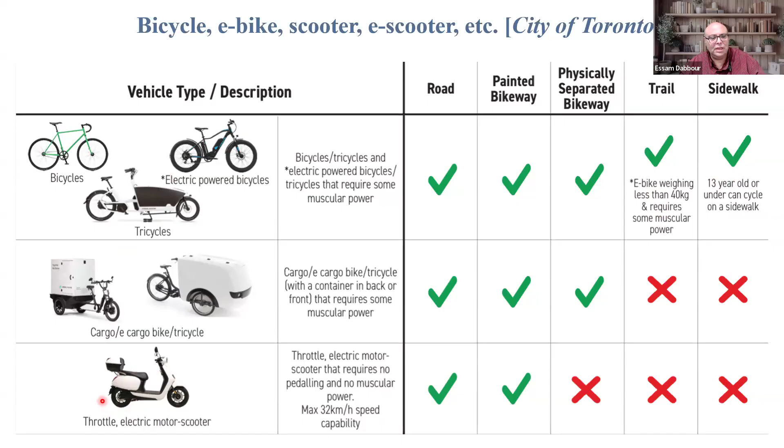Of course we have electric motor scooters, e-scooters, which are more common. I'm a little surprised here because I was not aware that the City of Toronto prohibits e-scooters on all types of facilities, even though I see those e-scooters in many other municipalities.

On the other hand, the kick scooter, the manual one, is only allowed on sidewalks and multi-use trails, but not allowed on roads or cycling facilities. Don't forget, this is in the City of Toronto - each municipality has its own regulation.

By the way, this is one thing I understand will be discussed during the upcoming CARSP conference about micromobility, and how municipalities can reach a standard way of allowing different types of micromobility so that users will not get confused.

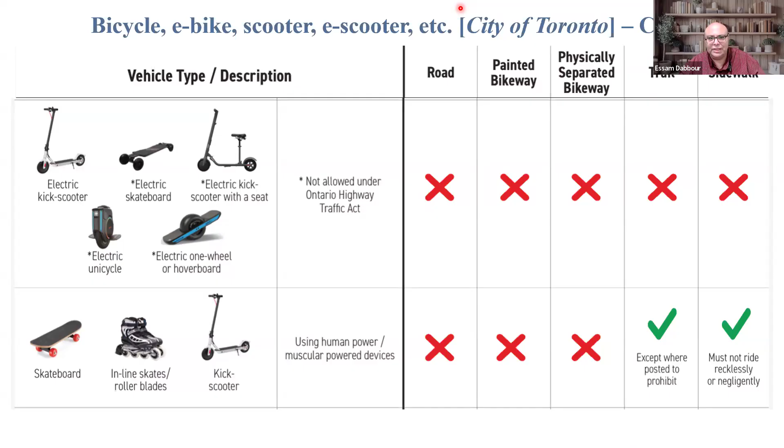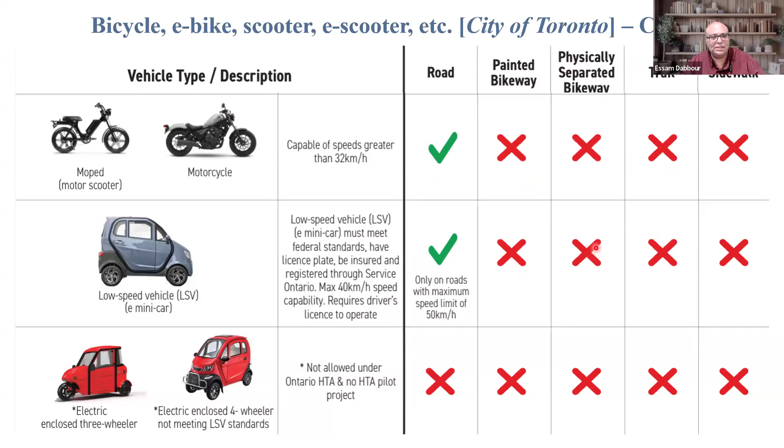Of course, a motorcycle is only allowed on roads, not allowed on sidewalks or cycling facilities. We have some other types of facilities for micromobility as well.

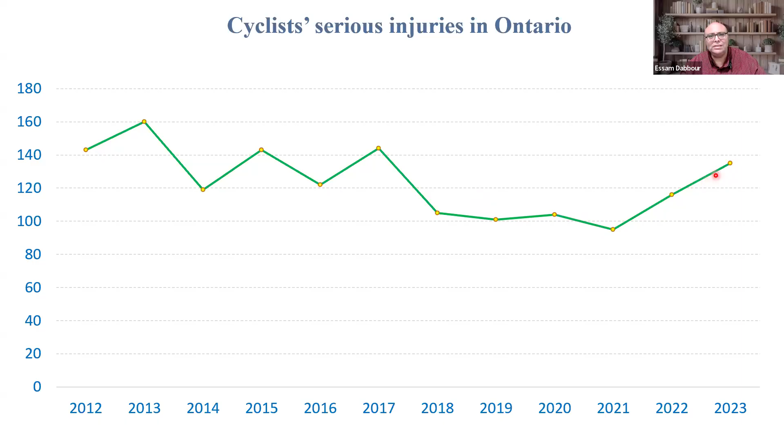In terms of serious injuries, it looks more steady than in Canada overall. It seems Ontario is doing a good job in terms of cyclist safety compared to other provinces, because serious injuries seem to be going maybe a little down or at least staying steady, not going up like the overall number in Canada.

In terms of injuries, the numbers seem to be going down, which is also very good news, especially knowing that cycling facilities in Toronto are increasing and many more people are now cycling compared to 2016, for example.

In 2016, fewer people were cycling and there were 37 serious injuries. In 2025, more people were cycling and there were only 27 serious injuries. Of course, again, we hope the number would be zero.

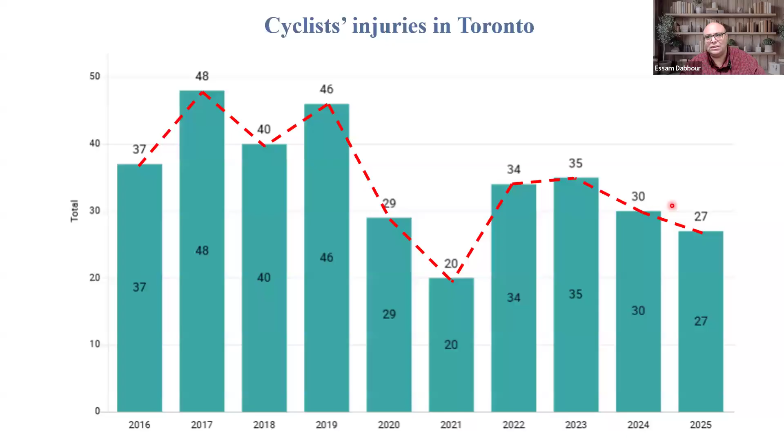To understand bicycle collisions, first we need to understand what we mean by momentum. As safety professionals, we understand that when two masses collide together, the impact depends on the momentum, which is the mass multiplied by the velocity. So the first mass has a mass of m1, moving at velocity v1, and the second mass m2 moving at velocity v2. The higher the mass or the higher the velocity, the more impact it will cause, and more impact means more injuries.

By understanding this principle, first we have a bicycle colliding with another vehicle - a passenger car, a heavy truck, or a bus. In this case, the bicycle has a lower mass and is usually moving at lower velocity, so most likely the cyclist will be hurt much more than the occupant of the motor vehicle. This is why we call cyclists vulnerable road users.

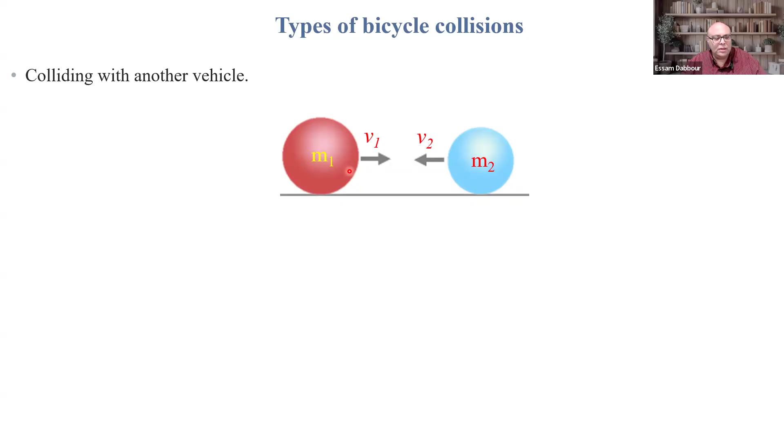On the other hand, if a bicycle collides with a pedestrian, it is a little bit different story. I'm showing these two images here. This is in case a bicycle is using the pedestrian crosswalk, which is not allowed by the law, and in this case the cyclist may collide with a pedestrian on the crosswalk. Or here in the other image, a cyclist is using the sidewalk and may collide with a pedestrian on the sidewalk, which is also not allowed.

In this case, by using the same principle of momentum, the mass of the bicycle and its user is slightly higher than the mass of the pedestrian. But the real problem is in the velocity. A bicycle is moving at a high speed, maybe 20, 25, sometimes up to 32 kilometers per hour, as compared to a pedestrian who is only moving at 4 kilometers per hour speed. So there is a large difference in speed, which in this case may result in injuries to the pedestrian.

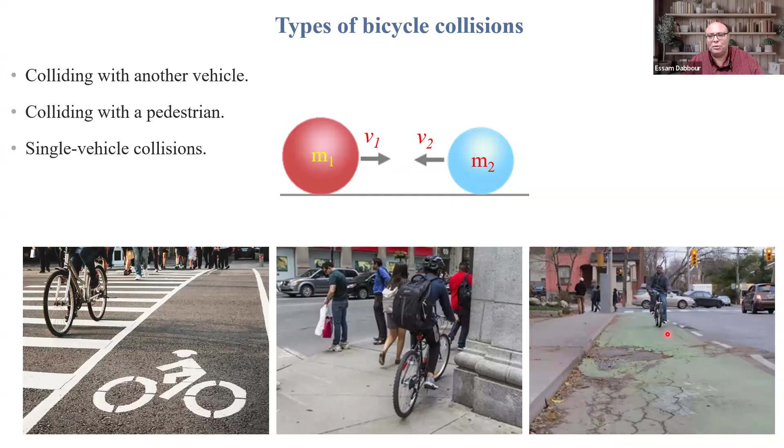I have already investigated many collisions like this one - a cyclist is using a cycling facility that is not well maintained, and the cyclist gets ejected from the bicycle and gets hurt. So this is the third type of bicycle collision.

We also understand that safety is always a shared responsibility, and this is the same principle in terms of cyclist safety. So the safety of cyclists depends on many stakeholders. First of all, the law - there should be laws that protect cyclists. For example, vehicles are not allowed to drive over cycling facilities, or vehicles must give right of way to cyclists, and other laws. So in terms of lawmaking and law enforcement, this is one factor that affects cyclist safety.

The second factor is the road authority, which must plan, design, operate, and maintain safe cycling facilities - we'll talk about this in more detail in the next slides. The third factor is other road users, who must respect the rights of cyclists and give them some space. And the fourth and most important factor is the cyclists themselves.

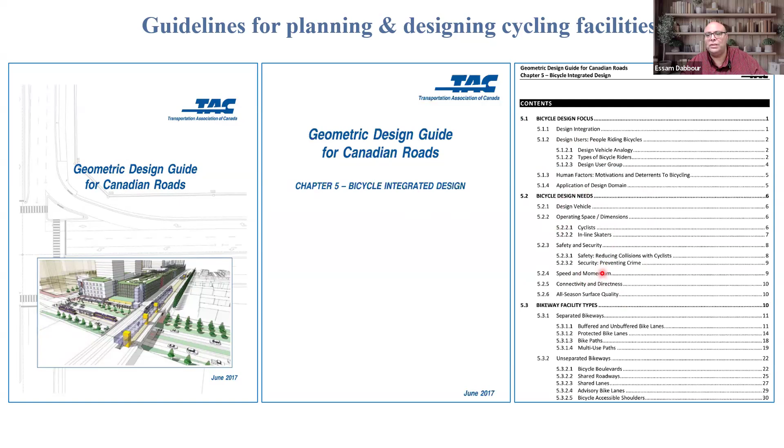We already explained momentum before. And what are the different types of cycling facilities? We'll talk about different types of cycling facilities in a few minutes.

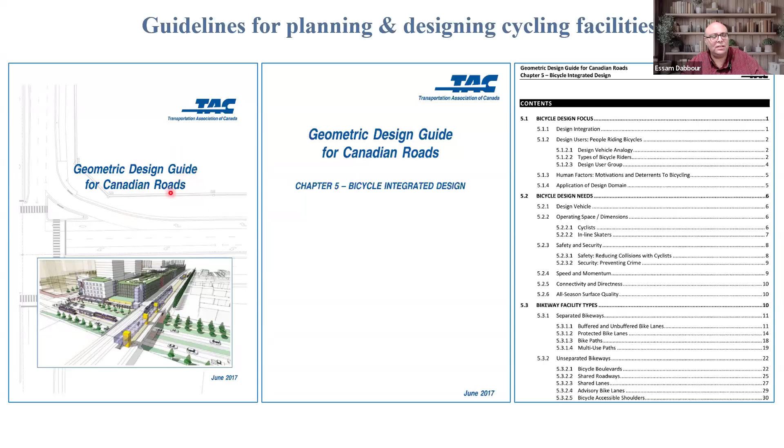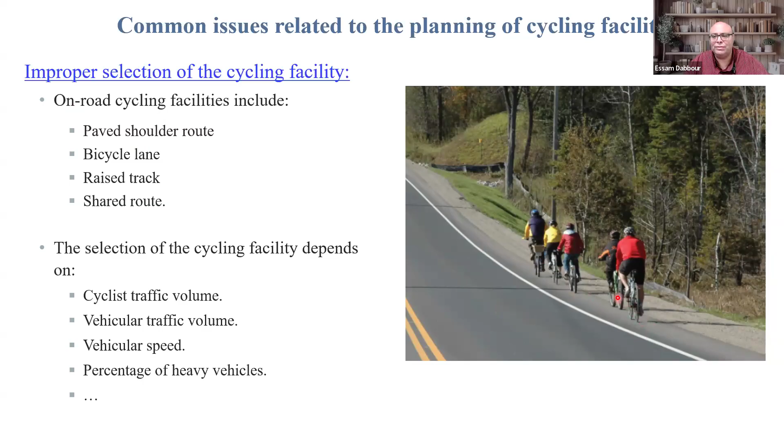This includes the paved shoulder route, like what you see here. This is more typical in rural areas where the shoulder is paved and provided for cyclists to use.

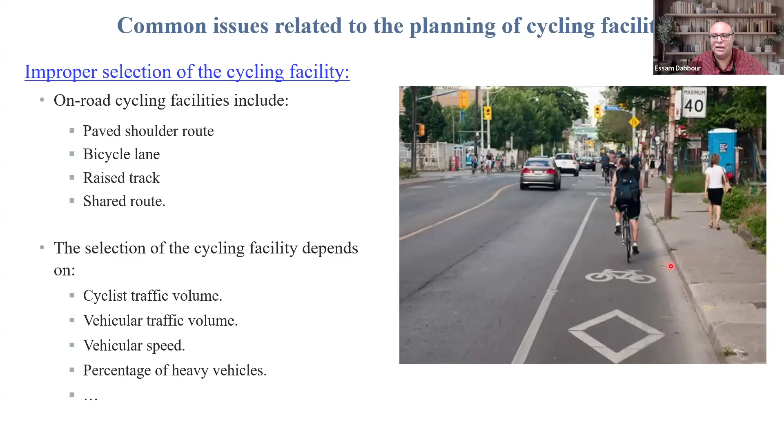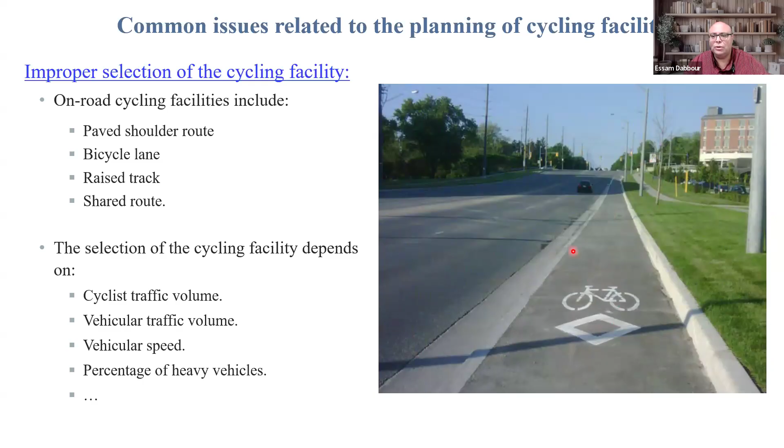Or a bicycle lane, like this one you can see here. This bicycle lane can have a buffer zone, or sometimes it does not, depending on space availability. There's also the raised track, more common in York Region, where cyclists use a raised track separated from the traffic lane and also from the sidewalk. Or a shared route, the lowest class of cycling facility, typically a traffic lane where cyclists are allowed to share with other motor vehicles.

The selection of the cycling facility depends on, of course, the number one factor I didn't even mention: the availability of space. If we have more space, we can provide a dedicated cycling facility. If we don't have more space, then unfortunately we may end up only providing a shared route like this one.

But there are many other factors, including cyclist traffic volume - if we have more cyclists, they need more dedicated facilities. Vehicular traffic volume - more vehicles means more risk and hazard to cyclists, so a dedicated cycling facility could be warranted. Vehicular speed - higher speed means more hazard to cyclists, meaning a dedicated facility could be warranted. Percentage of heavy vehicles - because of their very large mass, if a cyclist gets struck by a heavy vehicle, a bus or truck, it is almost certain to be a fatal collision. So a dedicated cycling facility could be more warranted if we have more heavy vehicles in traffic.

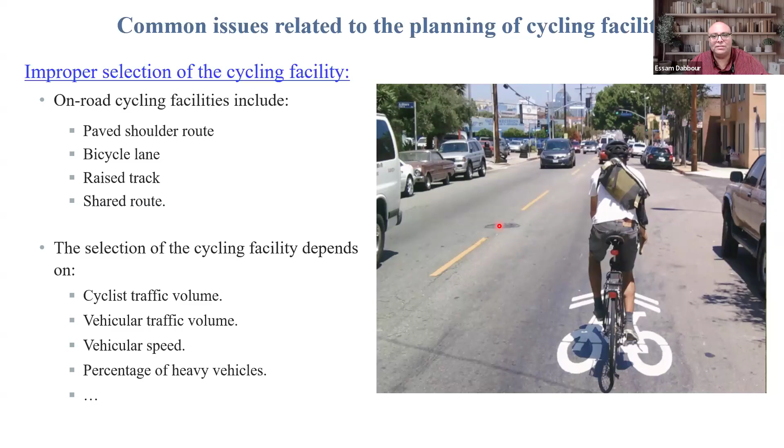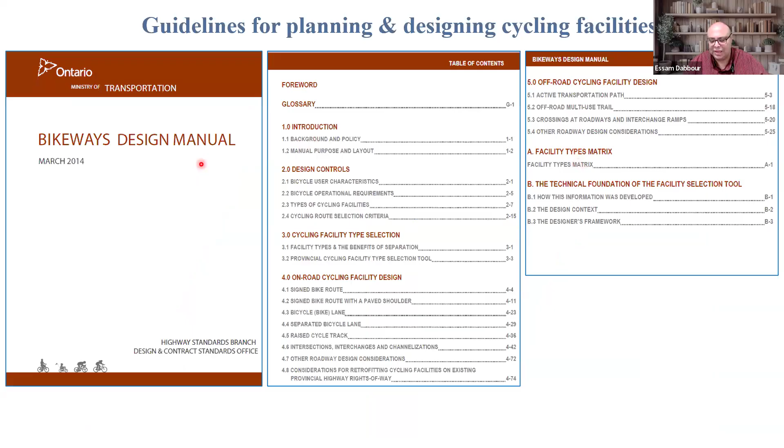So it is a somewhat complicated process to select which type of cycling facility to use. I understand this manual has a decision tree you can follow to decide on the type of cycling facility. You can see it here in this manual, and it's also in the Ontario Traffic Manual. There's another decision tree provided in the TAC guidelines as well.

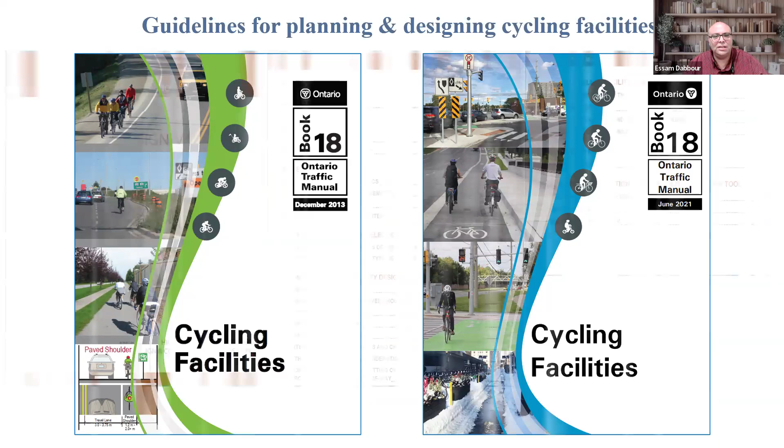Another common issue is if the road authority decides to install a dedicated cycling facility while there's a large right turn volume. In a case like this, theoretically speaking, the driver should always check for the blind spot when making a right turn, which is true. But unfortunately, drivers sometimes forget, or sometimes they don't care, or sometimes they check but are physically unable to see an oncoming bicycle. In this case, there could be a collision between a right-turning vehicle and a bicycle on the dedicated cycling facility. I have already seen at least 18 or 20 collisions like this.

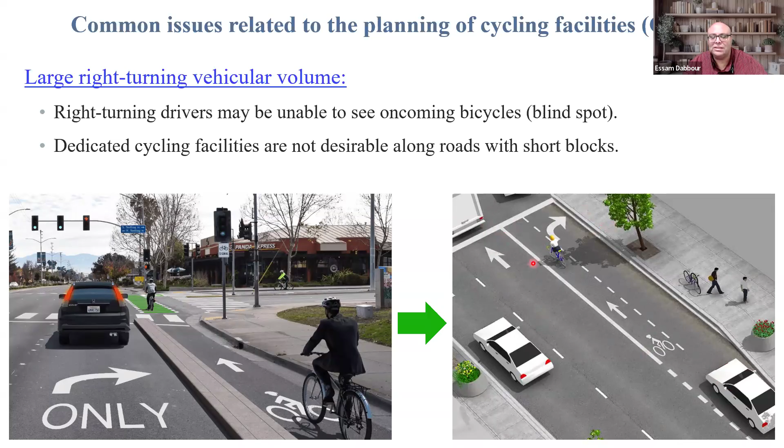Because of this, the rule of thumb is that a dedicated cycling facility is not recommended if the road has short blocks. If we have many cross intersections along the road and many drivers are making right turns at those intersections, a dedicated cycling facility is not recommended, or if you provide it, then you need a signal for the cycling facility, like this signal here. There could be a solution where the right turn starts before the intersection so drivers can merge before reaching it. This may reduce the risk a little, but it will not eliminate it. The rule of thumb is usually to avoid cycling facilities on roads with short blocks and several intersecting streets with high right turn volume.

Another problem here is on-street parking. Unfortunately, many cyclists get hurt because of what we call dooring. This is when a driver parks the vehicle, opens the door to exit, and a bicycle is moving, and the cyclist does not expect the door to open suddenly and ends up colliding with the open door and getting hurt. This is called dooring.

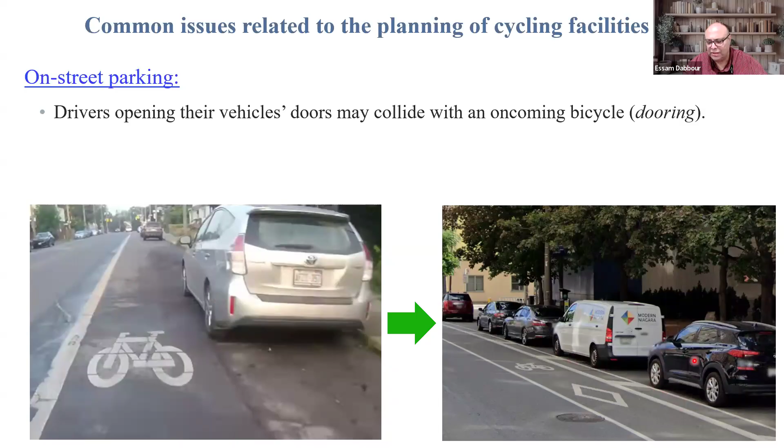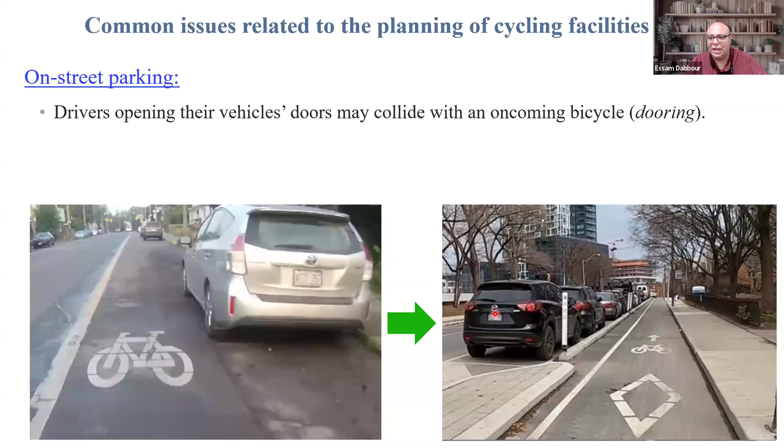Because of this, it is not recommended to use this configuration for on-street parking. Instead, many municipalities now use a buffer zone between the on-street parking and the cycling facility, a buffer of at least 1 meter to allow the door to open without colliding or obstructing the path of cyclists. Or a better solution is to move the cycling facility to the other side, like in this photo, so that when drivers open the driver's side door, it does not obstruct the cycling facility.

Now, let's move to other common issues related to the design of cycling facilities.

One of them is the improper discontinuation of cycling facilities. Sometimes it is necessary to terminate a cycling facility. The question here is where to terminate it. According to the latest edition of the Ontario Traffic Manual book number 18, cycling facilities should not terminate at an intersection. Instead, they must be terminated at mid-block. The reason for this is obvious, because at an intersection there are several conflict points, and drivers usually have divided attention because they have to look at all those conflict points.

So a driver approaching an intersection would be looking for vehicles coming from three other directions, vehicles making a left turn, vehicles making a right turn, and pedestrians on the crosswalk. So the driver may not notice a cyclist merging with the traffic lane. Because of this, it is now recommended to terminate cycling facilities mid-block, at least 150 or 200 meters upstream of the nearest intersection.

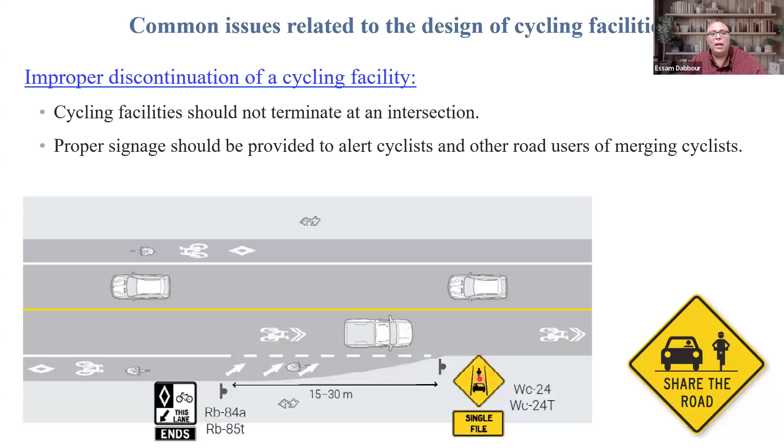However, in some situations, if it is necessary to end the bicycle facility at an intersection, then this is the configuration to use, which is not recommended. But only if necessary, you must provide a minimum of 30 meters for cyclists to merge, and of course you must alert cyclists that the cycling facility has now ended.

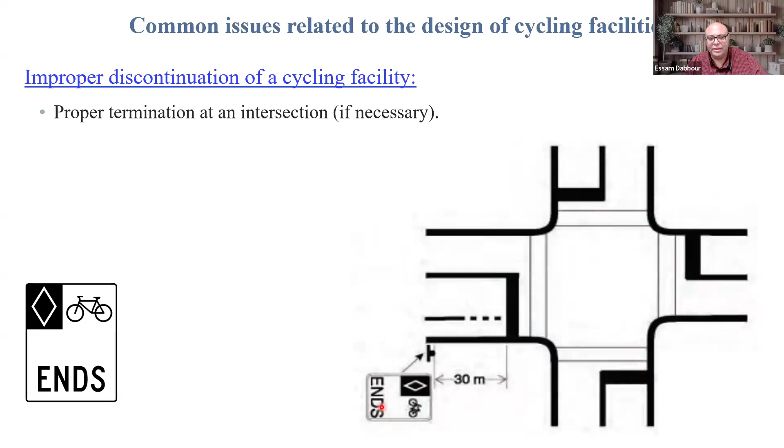Another issue common in many municipalities around Canada is the lack of bicycle crossing at intersections. This photograph I took myself while investigating a bicycle collision. Unfortunately, this is a cycling facility, and where does it go? Nowhere. Now if a cyclist wants to cross the road, they have to choose between two options, both not good: either cross mid-block, which is unsafe, or cross using the pedestrian crossing, which is also unsafe and prohibited by law. So in a situation like this, the road authority did not do a good job providing a dedicated crossing for the cycling facility.

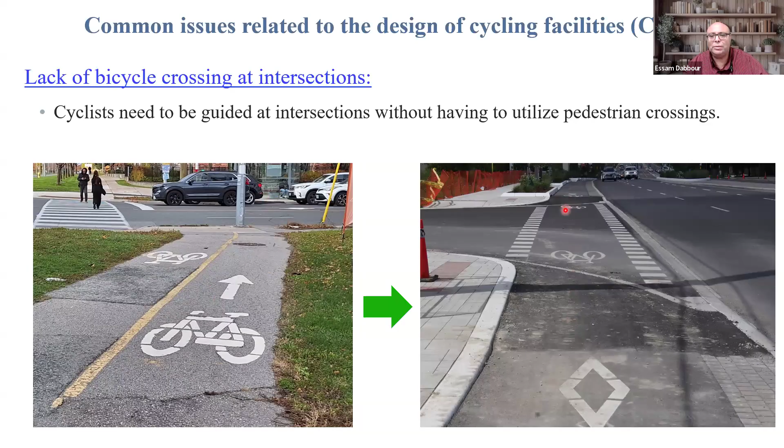And this is the proper treatment. If this is the cycling facility, there should be a continuation and a dedicated crossing for the cycling facility that is separated from the pedestrian crossing.

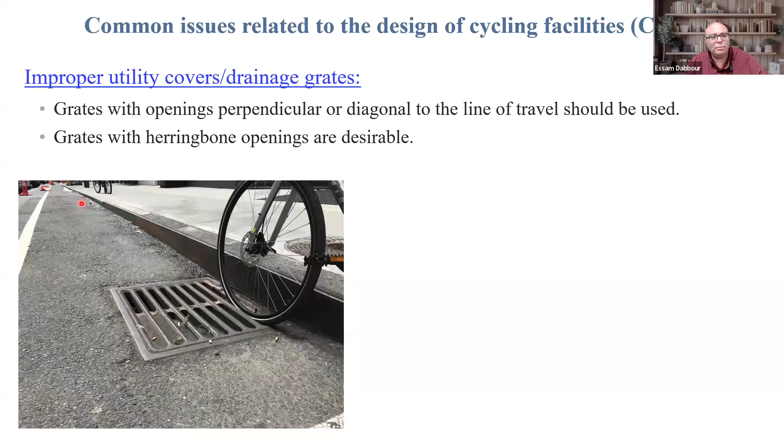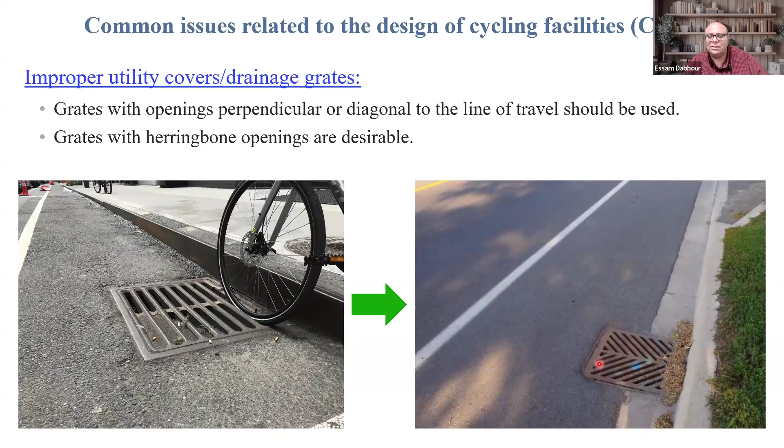Another problem is the improper use of utility covers, like catch basin covers. If you use this type of cover, the wheel of the bicycle may get caught inside it. This is why it is always recommended to use openings that are perpendicular to the travel path of bicycles, or more commonly now, what's called herringbone openings. The herringbone opening looks like a fish bone, which is more practical and safer for cyclists, like what you see in this photo.

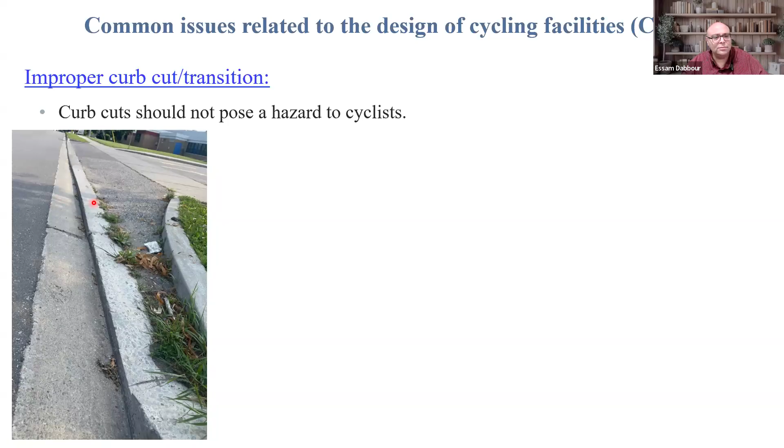Another problem is improper curb cut. I took this photograph myself when investigating a bicycle collision. As you can see, there is a high lip between the driveway and the traffic lane. If a cyclist wants to enter this driveway - and by the way, this was a school, so many kids were cycling to school - this is how the curb cut looked. A cyclist turning into the driveway may hit this lip and be ejected from the bicycle and get hurt. This is just a zoomed-in photo to show the lip.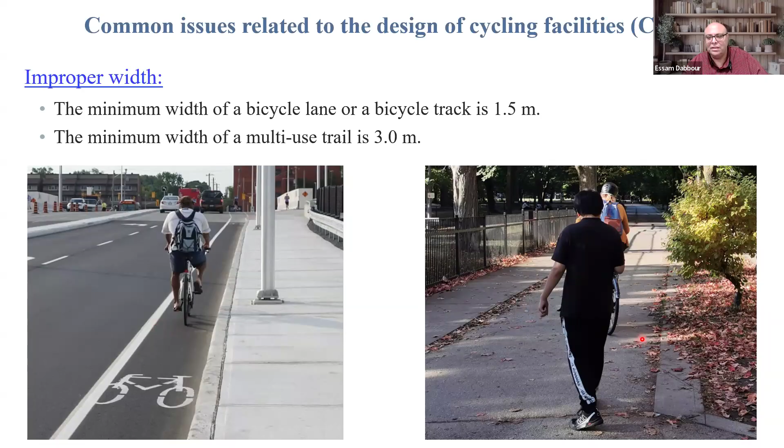And here, this is a multi-use trail inside a park where pedestrians and cyclists share the same trail together. In this case, the minimum width should be at least 3 meters to allow cyclists and pedestrians to safely share the trail. If the width is less than 3 meters, someone can get hurt.

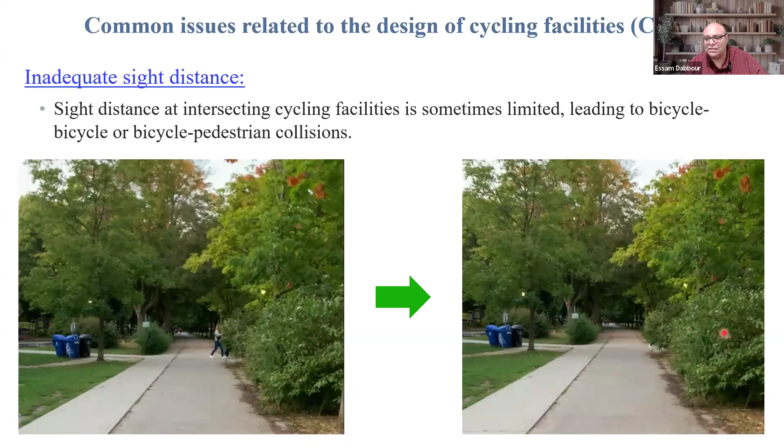Another problem is sight distance. We understand that sight distance is more commonly related to collisions involving motor vehicles, but sometimes it is also relevant to bicycle collisions. For example, this is a multi-use trail intersecting with another multi-use trail. You see where this lady and this gentleman are going - they are actually going onto another multi-use trail. If someone is riding a bicycle along this trail and someone else is riding along the other trail, they may collide with each other.

Again, you may say, if a cyclist reaches a situation like this, they must stop and look before proceeding, which is true. But unfortunately, some people don't do this. Our job in terms of safe system design is to allow for human errors. It doesn't mean we want people to drive or ride recklessly, but we must allow for normal human errors. So in this case, this tree should have been cut down or at least trimmed to allow for better sight line between the intersecting trails.

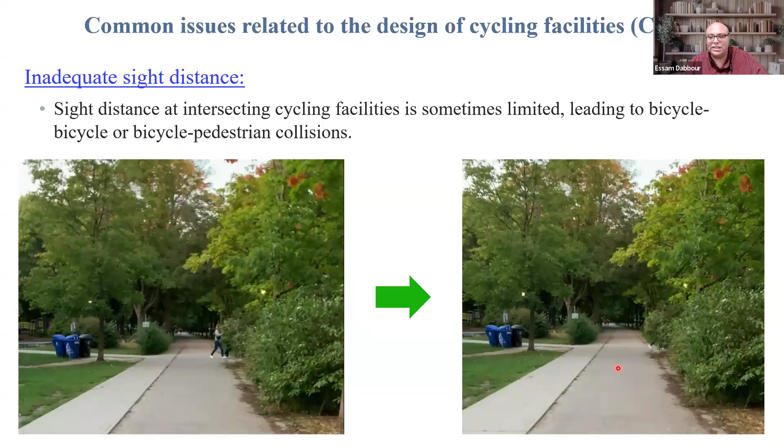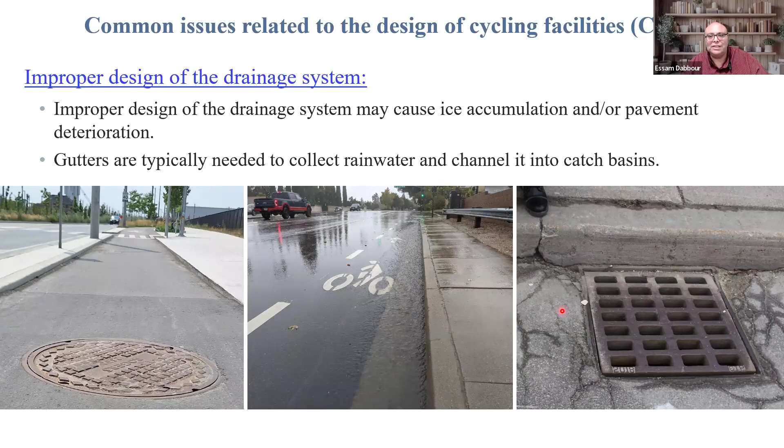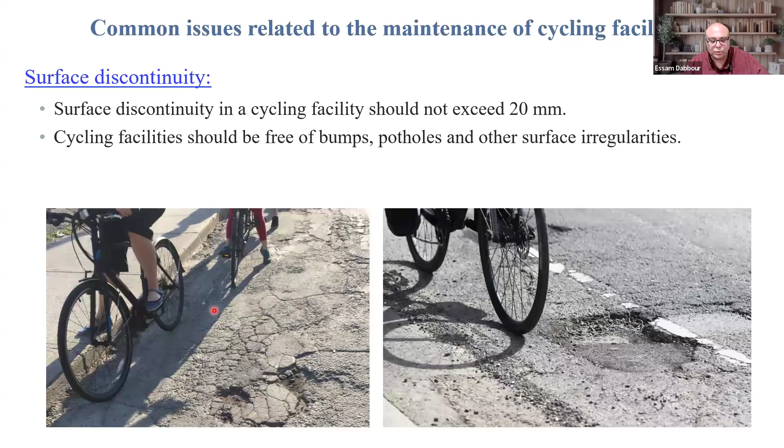Another problem, of course, is surface discontinuity, which is more related to maintenance of the cycling facility. As you can see in these photographs, it is not safe to ride a bicycle over cracks, potholes, and surface discontinuity. According to design standards, cycling facilities should be free of bumps, potholes, and other surface irregularities. Any surface discontinuity should not exceed 20 millimeters, or 2 centimeters, because bicycles don't have a suspension system, so they cannot tolerate large surface discontinuities like other motor vehicles.

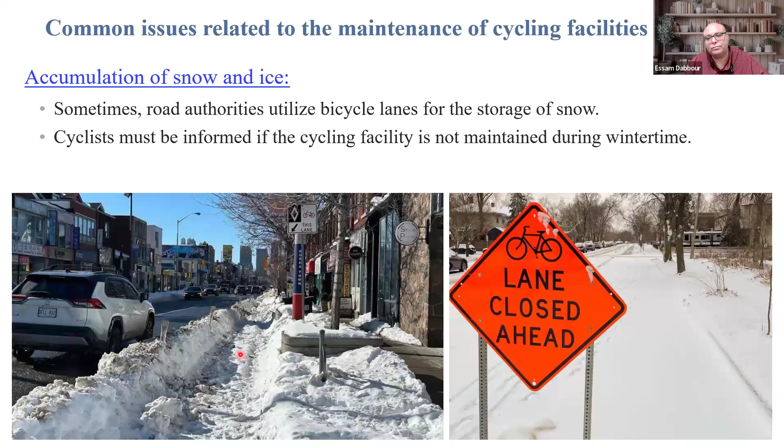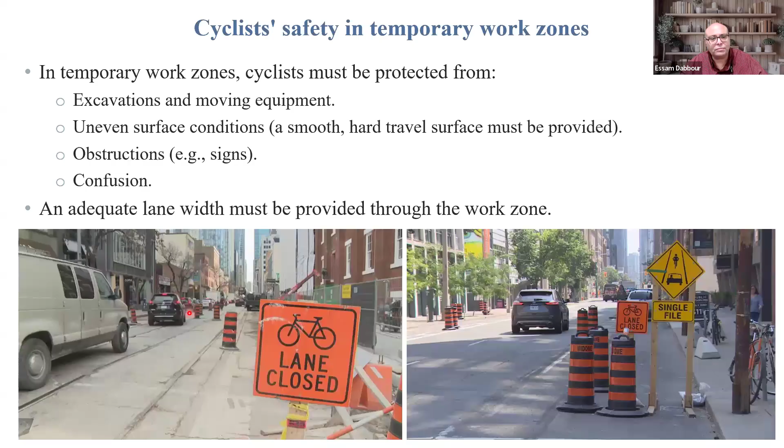Now we spoke about collisions between cyclists and pedestrians. According to the law, cyclists should not use sidewalks or pedestrian crossings. Why? Because of the same rule of momentum that we spoke about before.

Momentum equals mass times velocity. The speed of a bicycle could be as high as 32 kilometers per hour. When compared to the typical speed of a pedestrian of 4 kilometers per hour, an impact from the bicycle to the pedestrian would now be multiplied by 8. 4 times 8 is 32. Meaning that any impact from the bicycle to the pedestrian will now be multiplied by 8, so a pedestrian could be seriously injured if struck by a bicycle.

Even worse, another problem here when a cyclist is using a sidewalk is that if a driver is emerging from a driveway or an intersecting street, the driver would look to the right and left to check the sidewalk, making sure no pedestrians are approaching. Then the driver starts to move while this bicycle is moving at a very high speed, as high as 32 kilometers per hour. The driver is not expecting a bicycle to be moving at such a high speed on a sidewalk, so the driver may strike the cyclist because they did not even expect a cyclist on the sidewalk. I have already investigated maybe 5 or 6 similar collisions to this one.

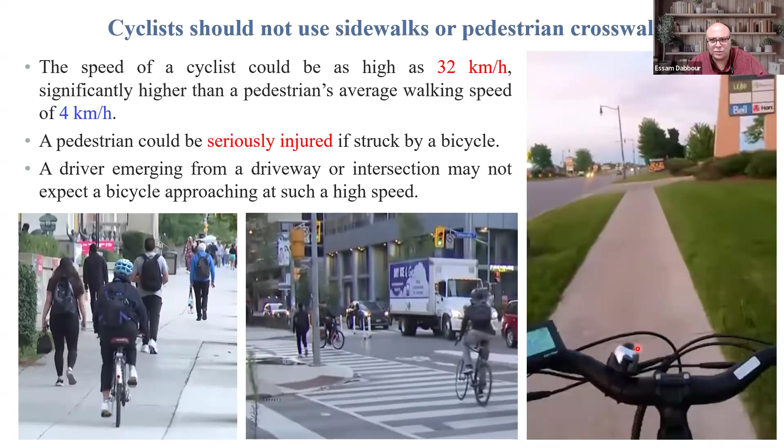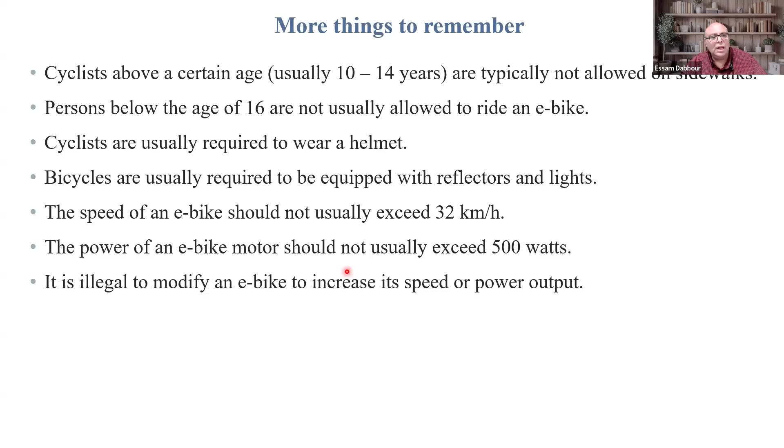So there are a few things to remember. Cyclists above a certain age, usually 10 to 14 years, are typically not allowed on sidewalks. Persons below the age of 16 are not usually allowed to ride an e-bike because they don't have enough expertise. Cyclists are required to wear a helmet. Bicycles are required to be equipped with reflectors and lights. The speed of an e-bike should not usually exceed 32 kilometers per hour. The power of an e-bike motor should not exceed 500 watts. It is illegal to modify an e-bike to increase its speed or power output.

I hope this part of the presentation will be interesting to you, given that we have less than 10 minutes. For each photograph I show you, I will pause for a few seconds for you to reflect on the photograph and try to identify what is wrong, and then I will give you my feedback.

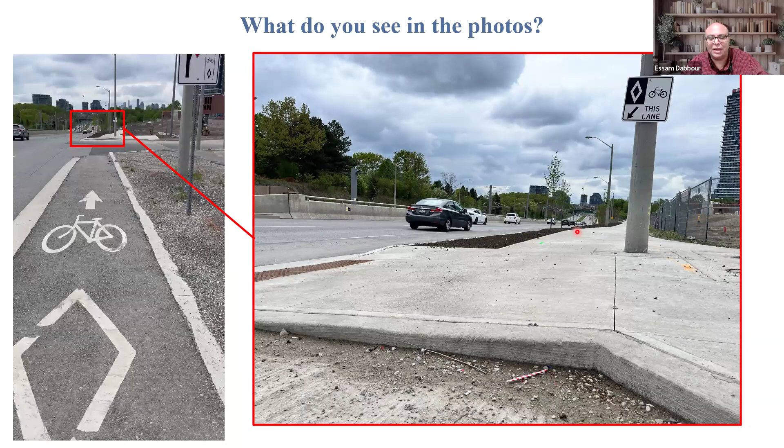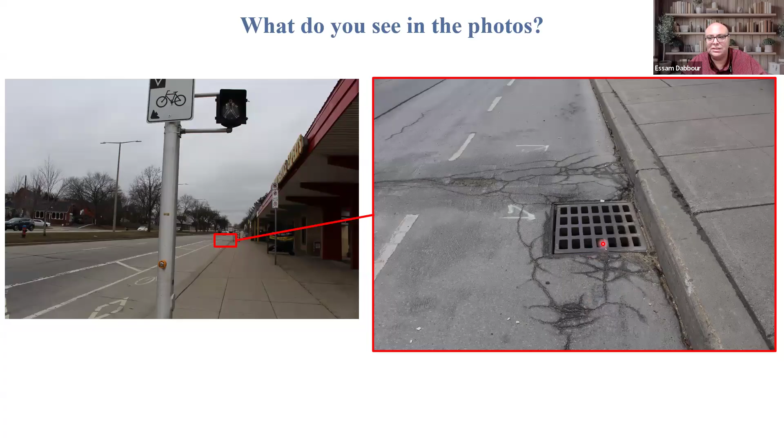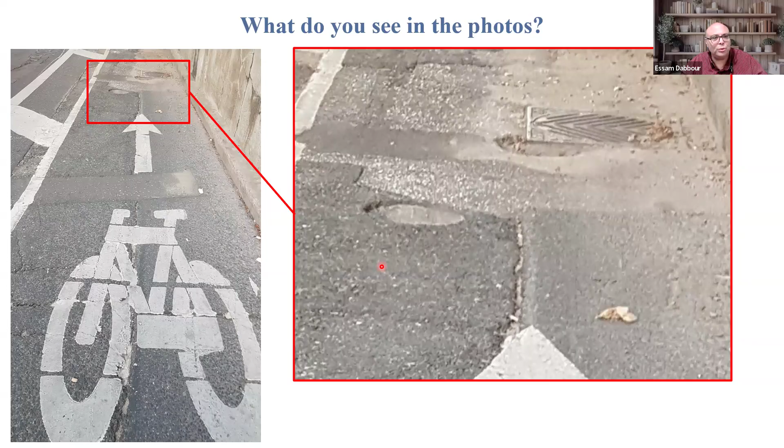This is another dedicated cycling facility, and this is how it looks like. You have a large pothole, you have a surface discontinuity, you have another pothole. Of course, it is not the best maintenance condition that the municipality can provide to cyclists.

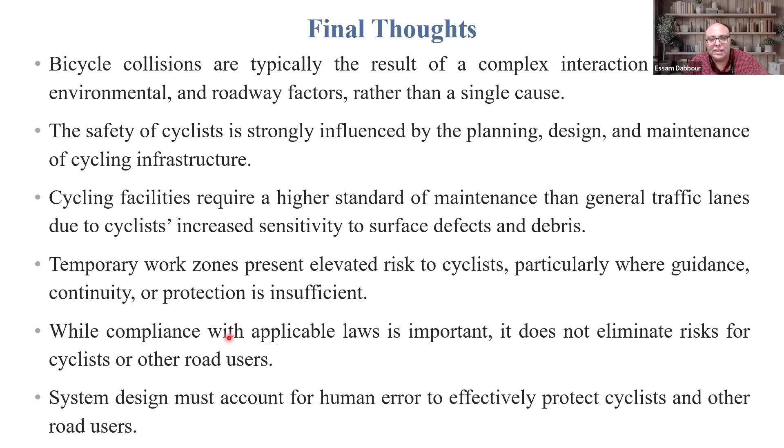So, final thoughts: bicycle collisions are typically the result of a complex interaction of human, environmental, and roadway factors rather than a single cause. The safety of cyclists is strongly influenced by the planning, design, and maintenance of cycling infrastructure. Cycling facilities require a higher standard of maintenance than general traffic lanes due to increased sensitivity to surface defects. Temporary work zones present elevated risk to cyclists, especially where guidance, continuity, or protection is insufficient. While compliance with applicable law is important, it does not eliminate risks for cyclists or other road users. System design must account for human errors to effectively protect cyclists and other road users.